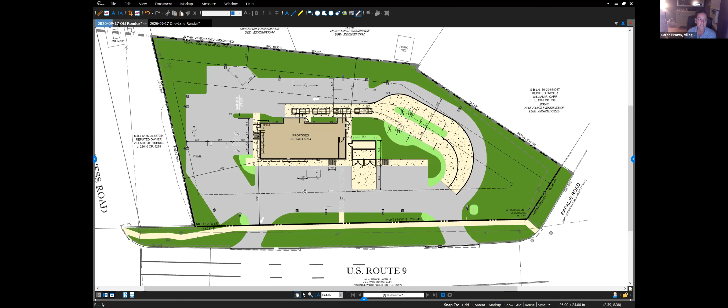But because DOT is an approving agent, and this directly involves that entrance to the site, I would feel better if we had something from DOT that they were good with this. I know they were good with it before with the two lanes, and if you're saying that they've seen this single lane plan, I think we're fine. But I would like to see some kind of documentation or something from DOT.

I'm still not... but I guess I got to back up. Where do you think there's less of a queue? I flipped back to the original plan.

Essentially, 6 or 7 more cars here in the red. But we found that they just don't have that kind of volume. That's the reason - if they had cars stacking out that far, they would keep the double drive-through lane. You're just not having that level of activity at the drive-through.

So, Steve, all we're asking is for you to either get us an email from DOT saying they have no problem with the change, or show us that the permit you already received was based on a single lane drive-through. Yeah, that's it. Okay.

We had great - to say we had great issues getting our final permit from DOT would be an understatement. So if that's a condition of the board approving this plan...

I'll be perfectly honest, I wonder if I'll be able to get a sign-off before we finish construction. Steve, at this point we're not asking you to get a new permit - you just advised us that the permit you applied for was based on. I'm just saying getting an email from them signing off on it might be difficult, but I understand what you're asking for.

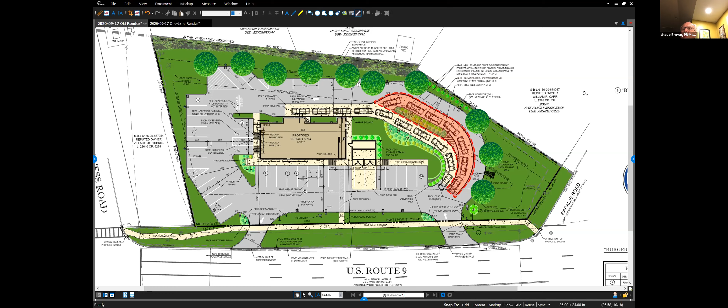So Hans, this is Steve. I agree, I think from an adjoining property owner's perspective this is an improvement, so I don't think we'd need another public hearing. But then I would also ask, is it both appropriate and feasible to notify the adjoining property owners of this change? They were fairly vocal at the public hearing about noise, light, and buffering, and this improves all those things. So it may be nice PR for both the village and Burger King to say we've moved the traffic noise and whatnot 8 feet farther away from your property lines.

So Steve, that's a good idea, and Burger King is welcome to do that, but there's no mechanism for the village to send out an informal notice like that, because then the public will want it on other applications as well. Okay, that's understood. By code, then we would have public hearings. Then I would encourage Burger King to do that.

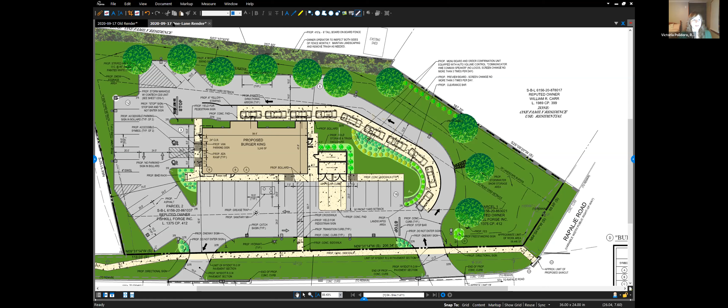Okay then, Angie, do you have an extra set to send to county planning? I don't know if we have an extra set. I would have to look. I'm not sure either. Steve, you may have to send one. I don't know, I can't see you right now, but you may have to send one to the village. Okay, just let me know.

And what's the date? Because we're really going to be running into it - they're planning on wrapping up about November 5th, they're going to turn the site back over to Burger King. What's the date of the next hearing, next planning board meeting? Let me see, it would be October the 15th. Okay, October 15th.

But again, just sending it to county planning shouldn't interfere with the construction, correct? It shouldn't interfere with the construction, but they have to do the site work. It's difficult to finalize the site work in this area since, in all likelihood, we would get this project approved, but we would be running a certain risk if we started building it with just a single lane.

Well, we have to wait for county planning, I understand, before we vote on this. So our hands are sort of tied on that point. I understand. Victoria, do you want to pipe in on that? You said it, you're absolutely correct. Even for just an amendment, are we required to go through the 239M review?

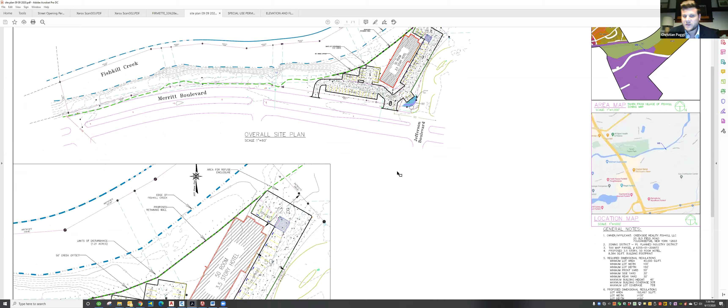We have done a cursory review of this. The biggest issues that we really identified from the get-go that will need to be addressed, and I think will really dictate what the site can accommodate, are floodplain, these easements, and also emergency access. I think early on this should be referred over to the fire department just to get their eyes on it, to see if there's any issues with this layout as far as access to the building, since it's a hotel and it's very tight, and there's not access all the way around the building, which may or may not be required depending on the building code.

We haven't looked at that, but the floodplain issue is going to be something that we'll have to look at closely.

Pretty much the entire site is within the floodplain, so they're going to need a floodplain development permit. With that, you'll have to demonstrate there's no impact to the downstream area as a result of filling the site, either by providing compensatory storage or an engineering assessment demonstrating there won't be any increase in flooding downstream. That's up to the applicant as how they want to handle it, but it will have to be demonstrated to the village in order for us to issue the floodplain development permit.

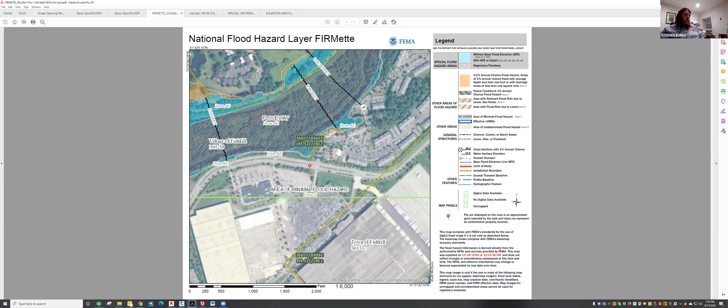Steve, how are you going to handle snow removal? Because it is a very tight site. There's actually quite a bit of room to put the snow on site in other areas. There's a 20-foot strip between Merritt Boulevard and the roadway. There's quite a bit of space down here that's actually very level, some room in the back and around the perimeter, and then, worst case scenario - probably wouldn't happen - there's also some space that's proposed as a lawn area in this area.

Okay. Sarah, planning.

Similar to Christian's office, we also didn't prepare a formal letter because we knew by the submission that this was just preliminary, just for a discussion item.

Stephen, one of the questions we had, I did notice on the EAF that it was tagged as a potential archaeological site. Have you guys done any research into that, reached out to SHPO or anything? I actually have not. I think it's just the proximity to the Fishkill depot. Okay, that was an autofill answer from the EAF mapper. Right, but I would recommend reaching out to SHPO just to make sure that's what it is and that it hasn't been tagged for anything else.

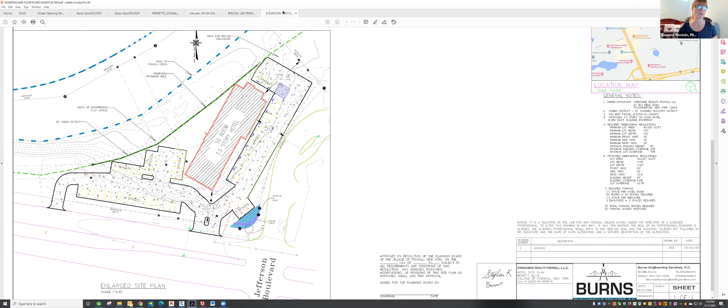My other thing is, this is not my expertise, but I'd like to make sure the Fishkill Creek, like everyone else is watching out for it too, because it does have trout. When you guys are talking about snow removal, that's important to me personally, where it goes, because if there's salt and stuff like that, I just wouldn't want it to affect the creek and the water and the fish and stuff like that. So going forward, just keep that in mind, that's about it.

Okay, Steve? Hans, I agree with the comments that have already been made, and I don't have anything new to add at this point.

Okay, next step is to submit some more information. I don't know if you've dealt with us before, Steve, but as long as an escrow account has been established, you can talk directly to our attorney, our engineer, and our planner directly, you don't have to go through us. Contact them directly at any time to speed this process along.

Victoria, I didn't mean to leave you out. Sorry - oh, that's okay. I just had a preliminary comment about the setback, it's 50 feet from the mean high water line. That's DEC's regulation, so I just wanted to make sure you were measuring from the right spot, because this will be referred to DEC at some point. Yes, that's the line that was located. Okay, good.

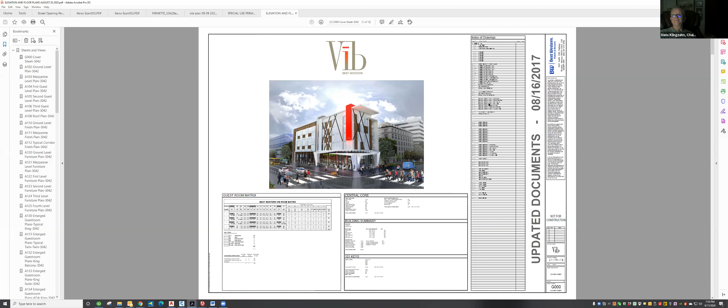That's all the agenda items that are on the agenda. I have some very sad news to present to the board. We are losing Suzanne. She has turned in her resignation. Suzanne, thank you very, very much for the time you have spent with the board. You will be greatly missed.

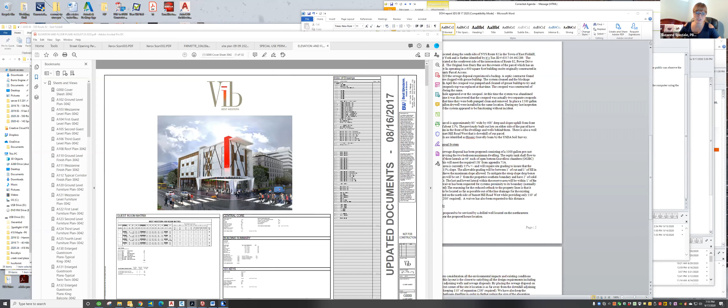Thank you very much. It's been a pleasure. It was hard feelings, but it's between work and my granddaughter. Work, we're losing like 30-something people in our division in the mental hygiene health department, so we're going to be really short-staffed. So it put me in a tough place. And also with my granddaughter, my daughter's back to school. So it was a hard decision, but not saying I'm permanently gone forever.

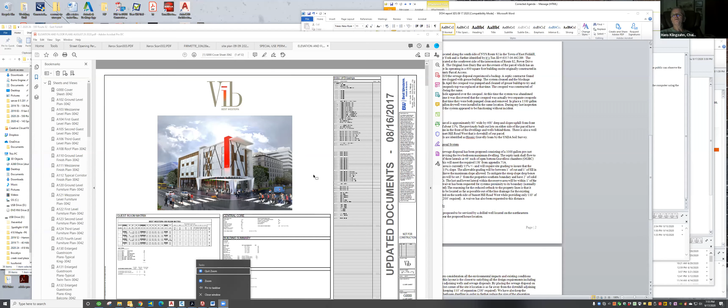Suzanne, please keep me informed, because in the future, if you find you have some more freed up time and like to come back, I'd like to invite you back as an alternate member and work you back onto the board. How would you feel about that? That sounds good, sounds like a plan.

I'll definitely be talking to you guys soon. It's been nice working with you guys. Great, and with you too, Suzanne. Thank you, Suzanne. Thank you very much, it's been really, really nice. You guys are all awesome, so it's sad. It's very sad, thank you.

Well, if you miss us a lot, you can zoom right in and see us. That's right, I could do that. I just can't wait, I'm more of an in-person type thing, I'm not like this computer person, I'm like an in-person thing. I can't wait for this to be over with. Well, nice to see you all. I'll be seeing you guys again soon. Okay, thank you very much, Suzanne. But you're not done yet, you still have one more vote to do. That's right, don't worry, I wasn't clocking out.

Thanks, Susan. I have a question. How did the election go this week? Dean and Trudy were reelected. Oh, okay, very nice.

Does any of the board members have any comments or questions, or want to say anything to Tom, before we close? No? Nope. This is an early one. Okay, then I'll entertain a motion to close. So moved. I second.